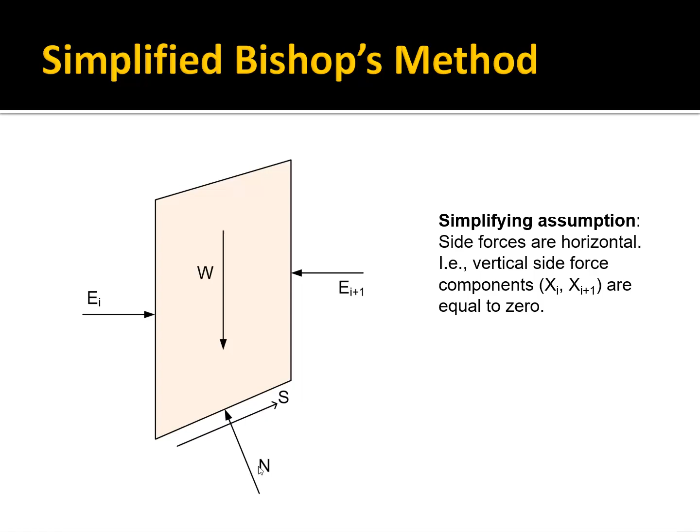number of unknowns. So we're going to sum forces in the vertical direction. So we have W, S, and N. So we have W acting in opposite direction of the N times the cosine of alpha, and S times the sine of alpha. So N cosine alpha plus S sine alpha minus W is equal to 0.

And the shear force S is equal to the shear stress times the width along the base of the slice, and the shear stress is equal to the mobilized shear strength, the shear strength divided by the factor of safety. If we look at the mobilized shear strength along the bottom, we get C prime delta L plus N minus U delta L. So this is the normal force minus the pore pressure force times the tangent of phi prime.

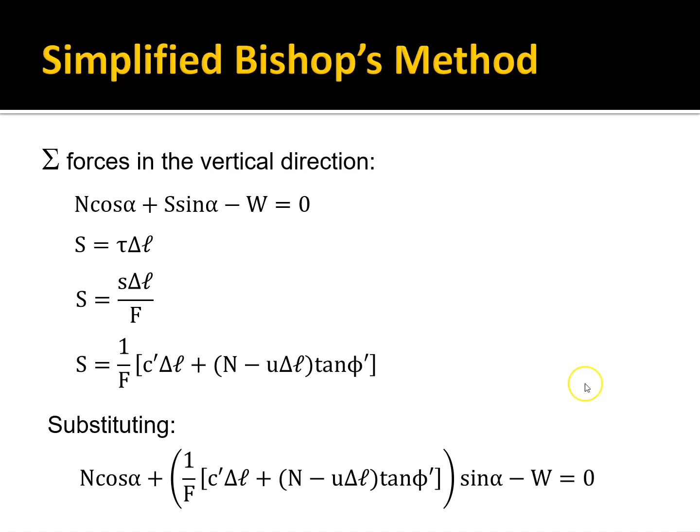And if you substitute this value for S up into here, you get this equation shown at the bottom. And then if you solve that for N, you get this equation for the normal force, and you'll notice that it has the factor of safety in the denominator and in the numerator, because of the representation of the mobilized shear strength. And so the effective stress is equal to N over delta L, the total stress minus U.

And then if we go back to our general equation, which we saw just a minute ago when we were talking about ordinary method of slices, this is the equation based on moment equilibrium around the center of the circle. We have the sum of the forces on the bottom of the slice resisting failure, and then on the denominator we have the forces driving failure. And this is, again, derived from moment equilibrium, where the radius term has been factored out.

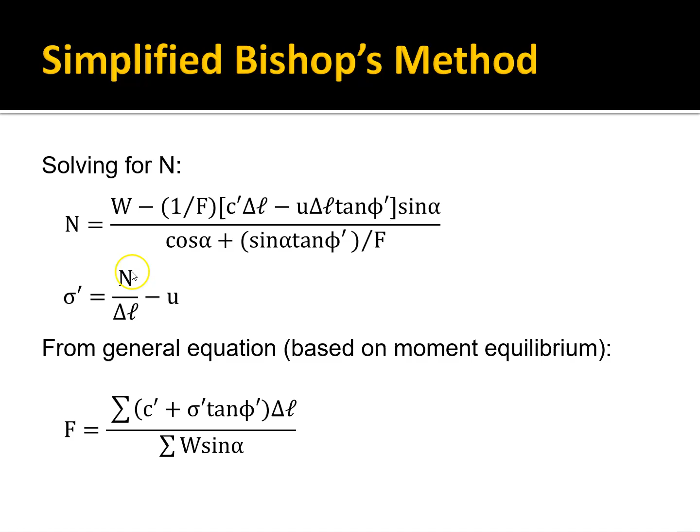And so if we plug this equation for sigma prime in here, and this equation for N into here, combine those three previous equations, and then solve for F, we get this equation shown on the top. And you will notice that it has F over here and then F on the left. So basically you have to assume a value for the factor of safety F and then solve for F, and then repeat until those two match. So it has to be solved iteratively.

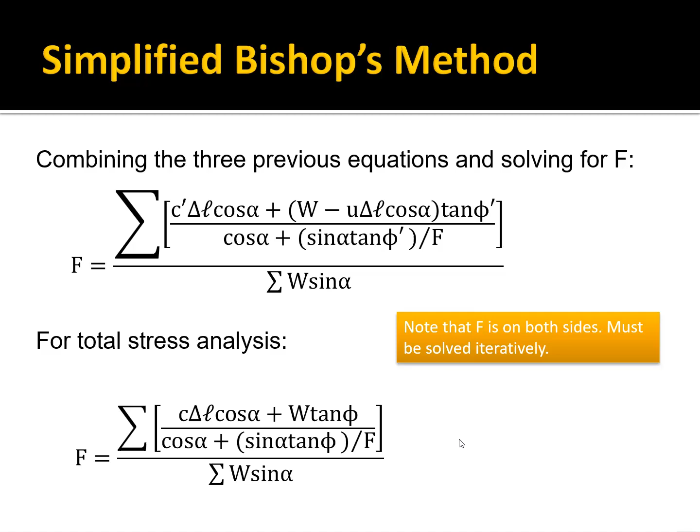If we do a total stress analysis, we're using total stresses and total forces instead of effective stresses. It simplifies to this form shown on the bottom. Still has F on both sides. And then if phi is equal to 0, then it simplifies to this, which should look familiar. It's what we saw with ordinary method of slices, Swedish method, etc., for the phi equals 0 case.

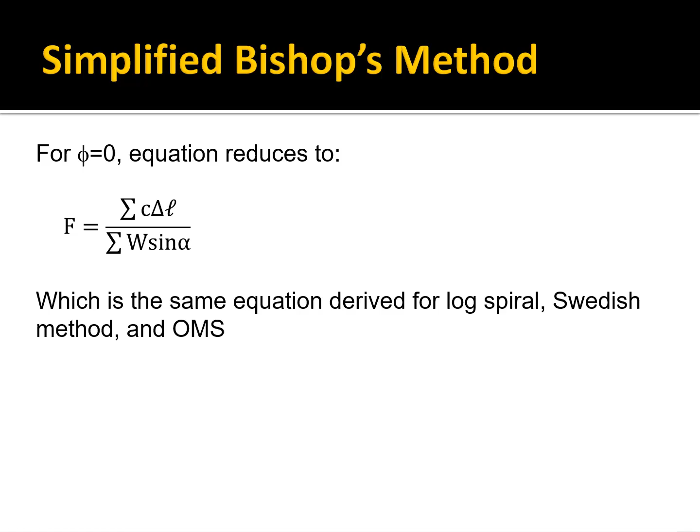So once the factor of safety is found, we can go back to the equation we derived for the normal force and calculate that. And if you compare this to the normal force for the ordinary method of slices, you can see the difference. The primary difference in the solution is due to the differences in the normal force. Both use the same overall equation. Again, this is our equation for the moments about the center of a circle.

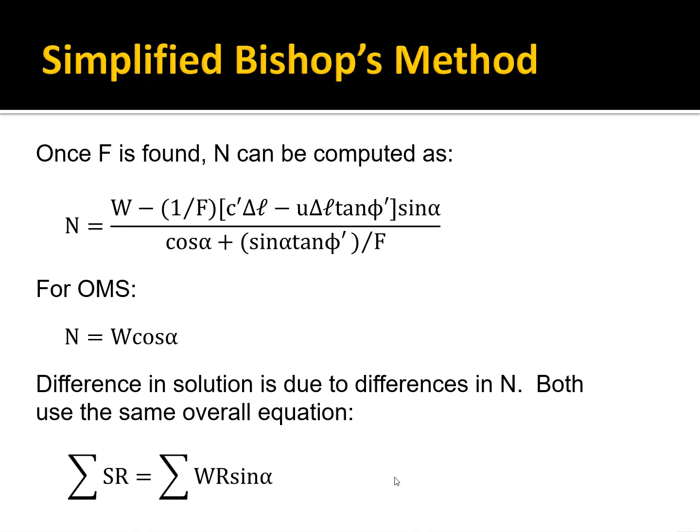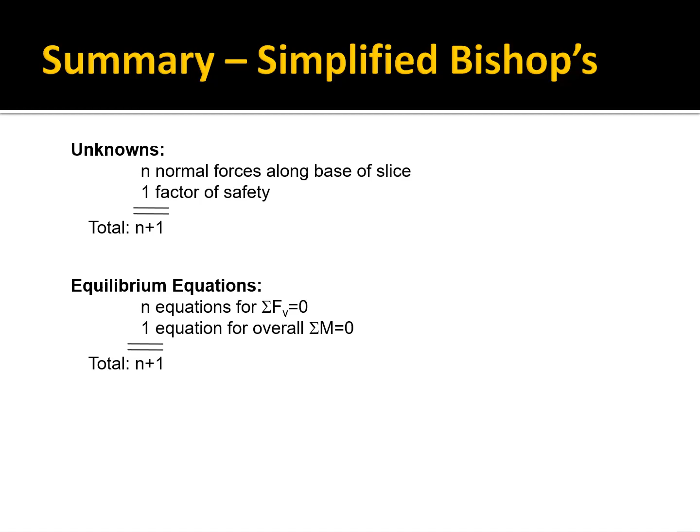And so, in summary, the simplified Bishop's method, our unknowns are the n normal forces along the base of the slice. The one factor of safety gives it n plus 1. We solve n equations for vertical force equilibrium and one equation for overall moment equilibrium, so we get n plus 1 equations solved. And so again, since it's based on moment equilibrium from a circle, you can only use it with circular slip surfaces. You can't use it with non-circular surfaces.

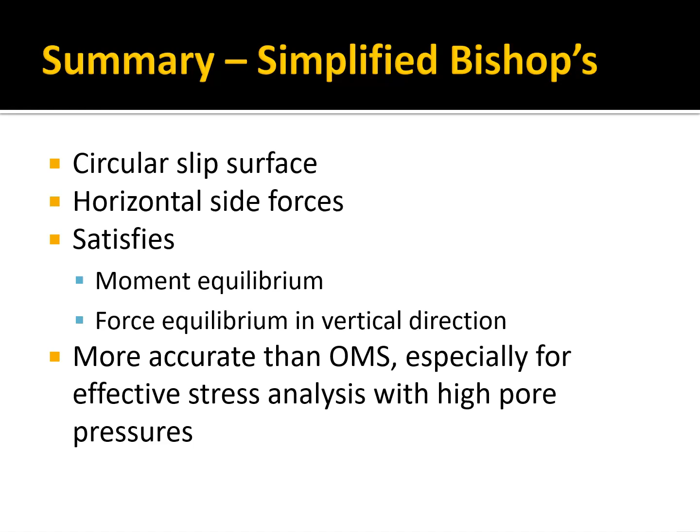The simplifying assumption was that the shear forces on the sides are 0, so the resultant force on the side is just horizontal side force. We satisfy overall moment equilibrium and then force equilibrium on each slice. It's more accurate than the ordinary method of slices, especially for cases where you have effective stress analysis and high pore pressures, where the ordinary method of slices can get you into trouble with its conservative answers.

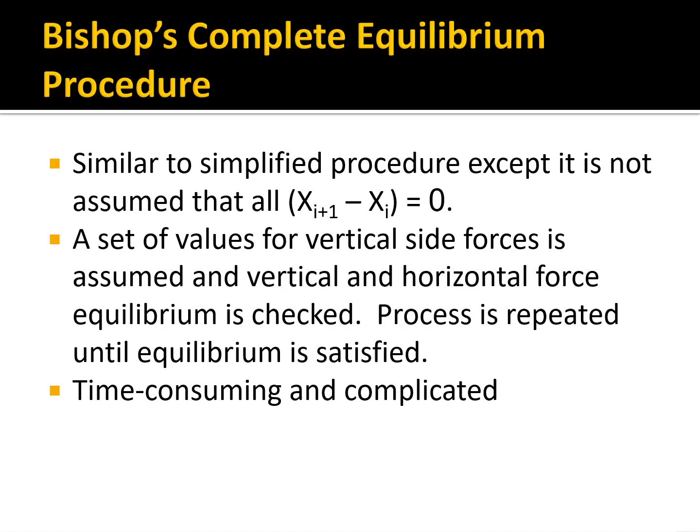And finally, there is, in fact, a Bishop's complete equilibrium procedure. In this case, we do not assume that the shear forces on the side sum to 0, but we make an assumption about the vertical side forces and check for equilibrium, and then you iterate with both the factor of safety and the side forces until you satisfy equilibrium. It's fairly time-consuming and complicated. There are simpler complete equilibrium procedures, which we'll talk about. Therefore, you don't use this a lot, but the Bishop simplified method is used quite a bit.